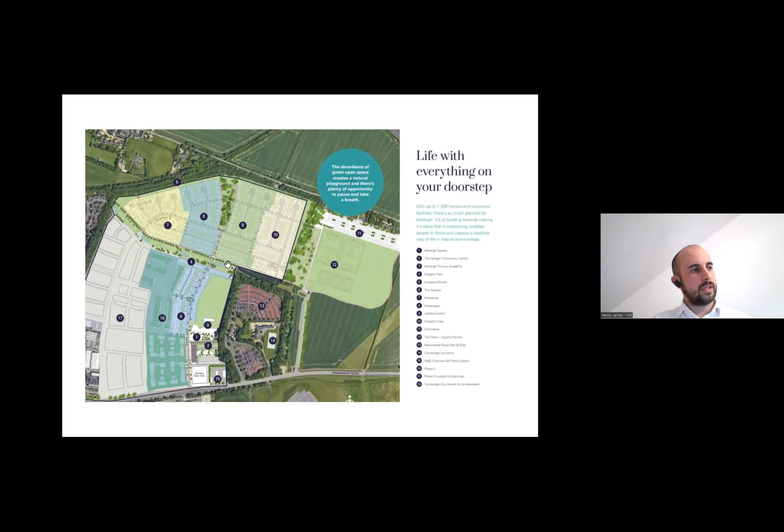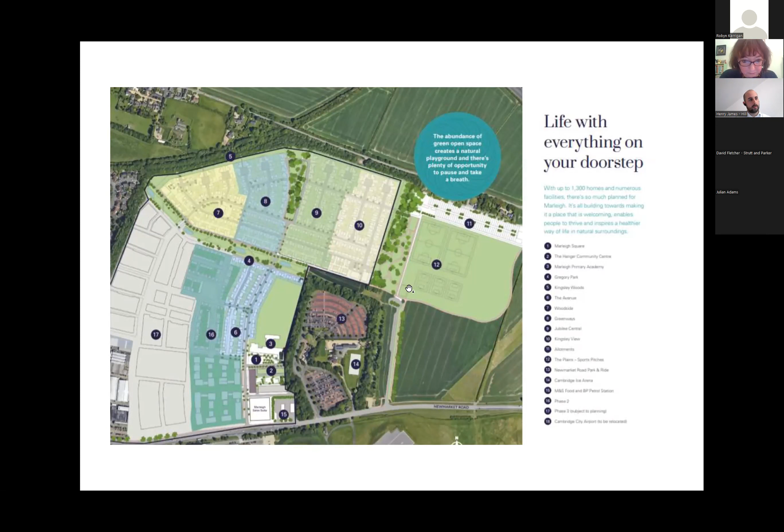And I think probably the final point I'll raise is on wider infrastructure and routes going on. For those who know the site well, you may have recently seen we've installed the bridleway through Kingsley Woods on the northern section. So in addition to what we've delivered previously, such as the new cycle route through the scheme, those wider connections are starting to take shape further. We've still got bits of work to do, so other works will be scheduled soon, which will finish off the routes on the disused railway line at the northwest of the site. There'll be further routes to come connecting into the site and beyond over at the Plains area in due course, at relevant trigger dates.

I've included a couple of drone images for context. This is within Marleigh at Gregory Park, looking back south towards Newmarket Road. You can see the delivery of the phase 1A houses here, and the apartments in the distance. The school site here, which Prue will talk about shortly, and then this area of vacant land here is phase 2 - you'll start to see that take shape over the next year as it's delivered. Beyond that is Marshall's retained land, which is phase 3 - the next phase of Marleigh in due course, though obviously a slightly different scenario given Marshall's existing operation.

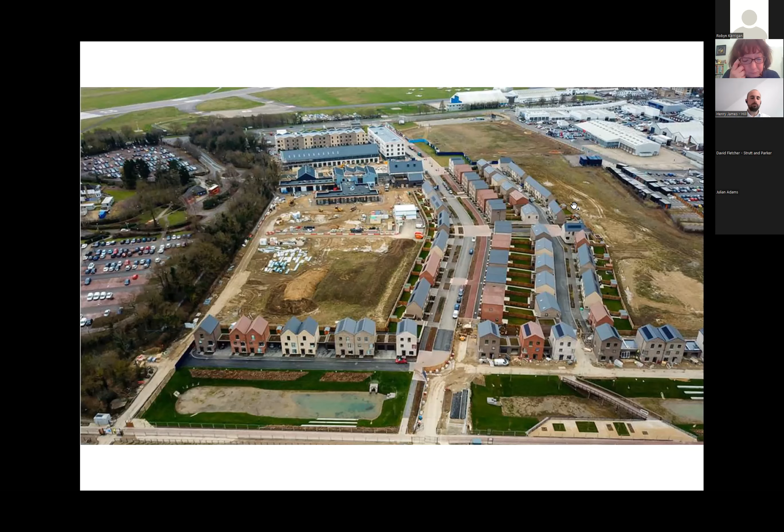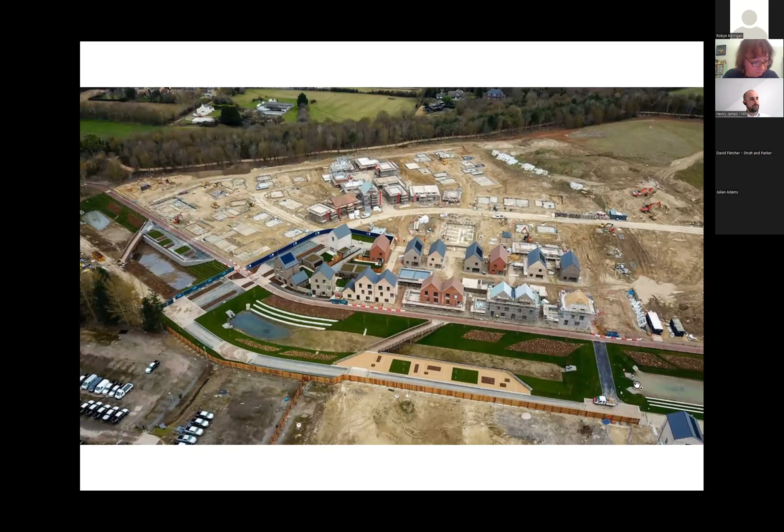This slide I wanted to include just to show context of the build phases 1B and 1C in phase 1 at the moment. 1B you can see here, and 1C to the side here. That will really transform over the next year or two. And Gregory Park itself, with the swales and the landscaping, is really starting to take shape now.

Here's one final image just to show the context of the remainder of phase 1, which, as I said earlier, will be delivered from left to right. Appreciate this isn't quite the right orientation, but from where my cursor is moving along over the forthcoming years.

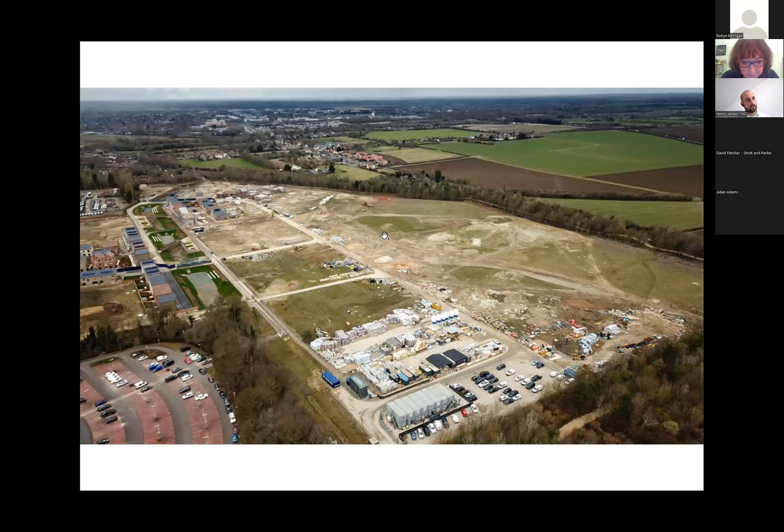So I'll hand over to Prue. I appreciate there'll probably be some questions - Sharon, I don't know if you want me to take the questions now or pick them up later, any preference? If you could pick them up later, please. Yeah, absolutely, that would be useful.

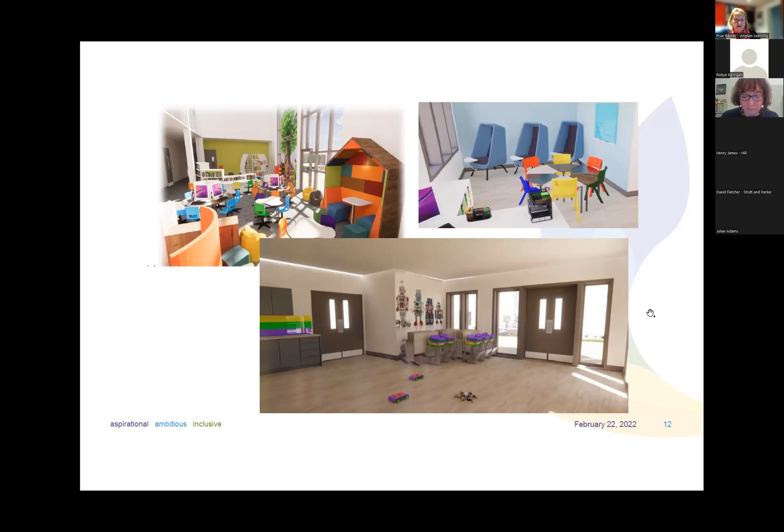The bottom picture will be our STEM room, where we will be teaching science and technology and developing IT, and certainly undertaking learning in computing and robotics. The last picture really enhances some of the information that Henry has shown.

One of our aspirations was for as many year groups as possible to have immediate access from their classroom to the outdoor learning environment. The only two year groups that won't have that are years 5 and 6. We think we've created an upstairs area where those children can start to graduate, and we'll start thinking with them about moving on to secondary provision. Thank you.

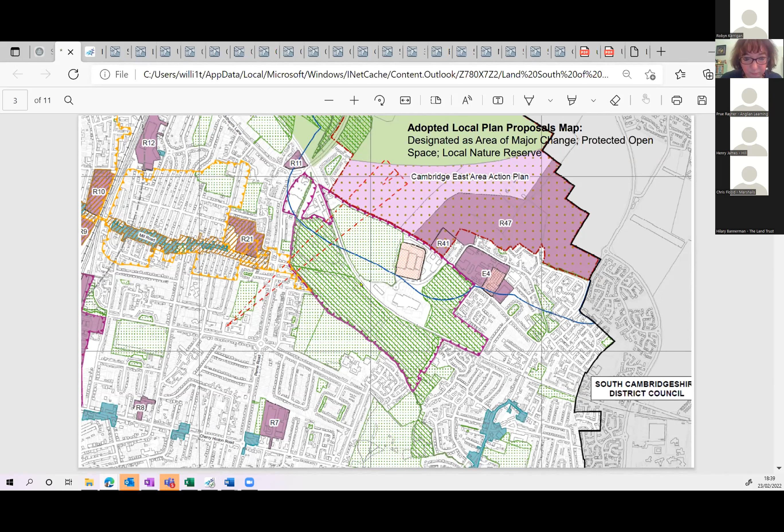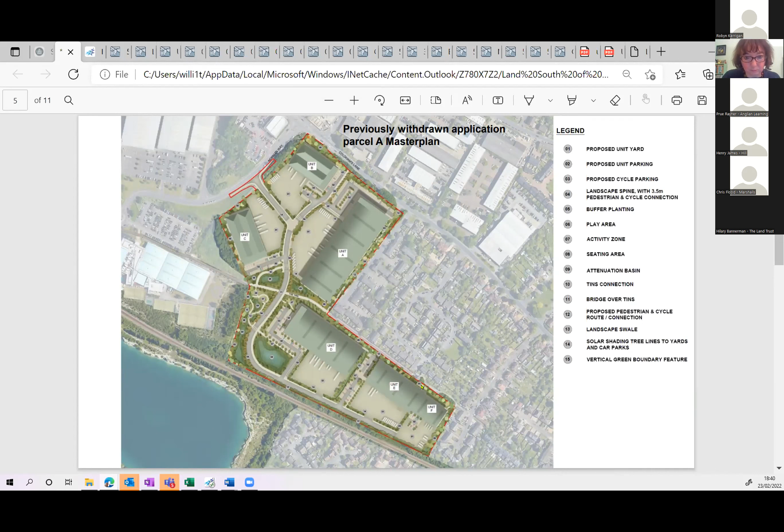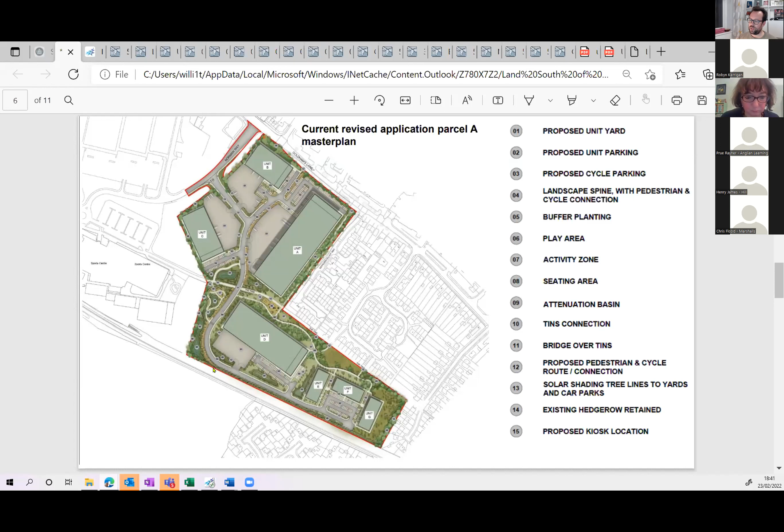close to the boundaries with the residential estates, Kathleen Elliott Way here, for example, to the east. You can see with this current revised master plan that the applicants have attempted firstly to pull Unit A away from this boundary, and then the biggest changes relate to the units proposed within this southern parcel here, not only in terms of the uses not encompassing B8, but also being pulled away significantly from the boundary with the tins here, this northeastern boundary. There's a landscape buffer proposed between these units, and the access is coming down to the south. This is the railway line here. So the indicative layout has changed considerably.

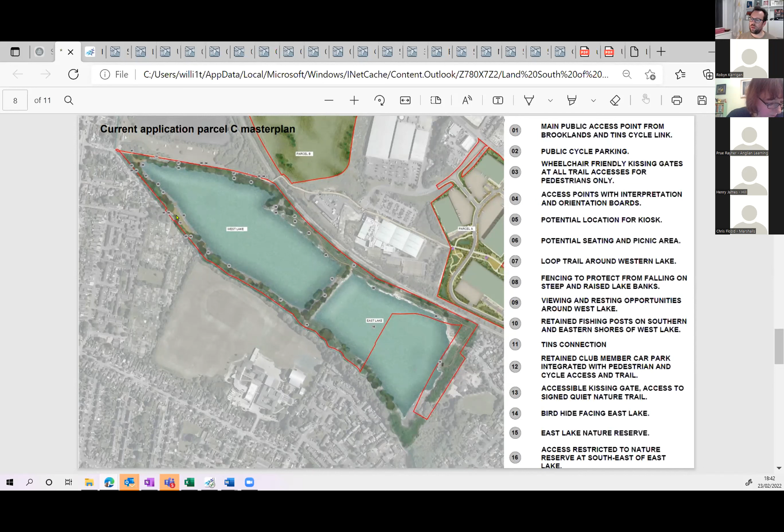This is another plan showing the proposals for parcel C, and then looking more closely at the west and east lakes. The master plan details some of the interventions that Andersons are proposing for the lakes, including some additional access points from the tins and a resurfaced car parking area down here on the west of the site.

and the environmental harm people are concerned will arise in terms of air quality and noise in particular, and HGV routing, particularly the timing of that, given that it's proposed as a 24-hour logistics centre. There are also a number of concerns raised in relation to biodiversity. The Wildlife Trust has provided an objection to the council on the grounds of biodiversity. There are also some local groups which have raised similar concerns to the Wildlife Trust in terms of impacts on biodiversity, and also the brook that runs alongside the southern side of the site.

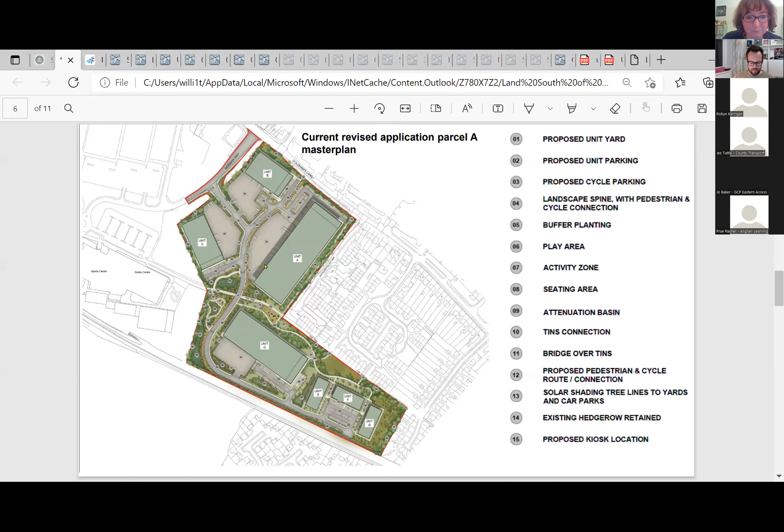Perhaps I can just share my screen again. That would be helpful. Hopefully I'll be more successful in sharing it this time. Or perhaps not. I can see the screen. Can you? I can't see it. Hang on, can you see the master plan, Sharon? Yes. Okay.

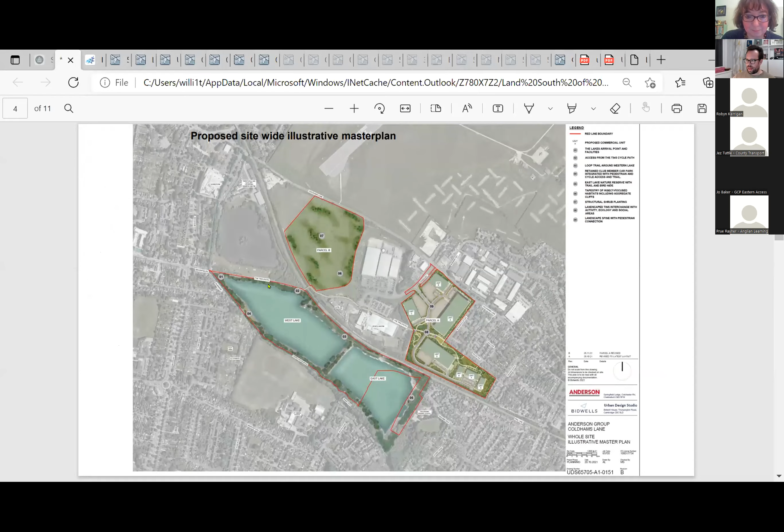So access to the lakes, as I understand it, is proposed in a number of locations: from the Tins here, at the main entrance at 1, another entrance at 2, and another entrance at 4 down here. I'm sure I've also seen a more detailed plan that shows an access halfway between 1 and 2 as well, but those are the access points, and from the Tins the access is pedestrian and cycle only.

Thank you, we've got another question from Salim Sadat, I'll read this out briskly, Toby. Prior to submission of application 21/02326 full last year, after many years of consultations with Anderson Group, we fully expected it to be similar to the proposals of a few years ago of low-rise commercial units for light industry and office space in accordance with the adopted local plan. However, what they submitted last year was totally different, in that they plan to build 8 storage units functioning as a 24/7 last mile logistics hub. The claim by Anderson Group in section 9 of their design and access statement that there'd been extensive engagement with the community for their latest plans is simply not true, as it bears little resemblance to their original plans discussed and exhibited in 2017, 18 and 19.

Just to say for everyone's benefit, this site benefits from outline planning consent, which was granted in December 2020. Following that, very shortly afterwards, Bellway Latimer acquired the site, and our first steps from a planning perspective have been focusing on the design code for the site as a whole, and also looking at the discharge of some of the pre-commencement conditions.

The real focus for the presentation today is really just to talk through the design code and where we've got to on that, and then at the end, to wrap up and talk a little bit about the public consultation that we're seeking to do on the design code, and the events that we've organised for that.

In terms of the design code, there's a lot of different strands that come into the document, and we've been working quite collaboratively with the Greater Cambridge Shared Planning Service, principally looking to set the design quality for the development as a whole, with real focus around the appearance of the buildings and how the layout of the site is going to work, key considerations around different street scenes within the development, including key principles around landscaping, along with what we're doing about energy efficiency - not just in terms of the built form of the houses, but also all the other land uses and how that fits into the overall approach to sustainability across the site.

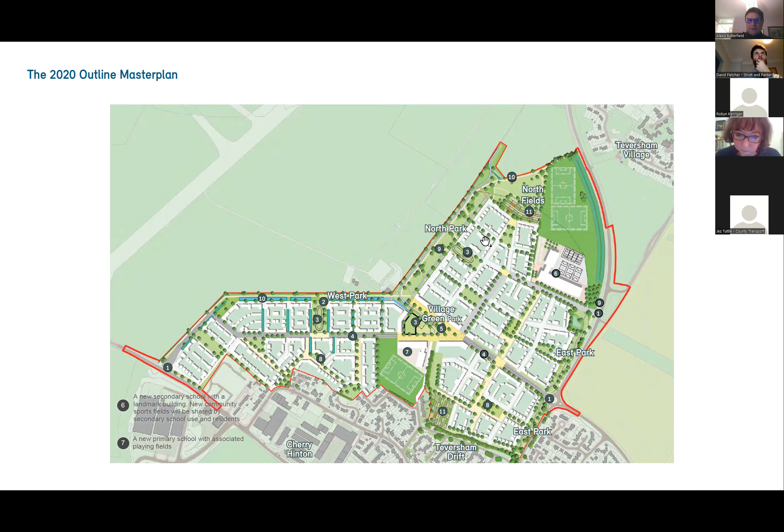So to kick that process off with the planning team, we first of all had a great day out doing a Cambridge project study tour, which meant we could go together as a shared group to a whole host of different recently completed projects within Cambridge and the Cambridge area.

And it was a really great opportunity to essentially find what works, and what lessons we can learn from those developments to make sure we're doing all the good things they did and avoiding some of the pitfalls.

So if I go to the next slide, following up from that, we've been undertaking a whole series of workshop events with the planning team, but also bringing in all of the members of highways and landscape, so that we can create a really kind of integrated process.

We've started from very simple beginnings, and we're going right through to quite a lot of not detailed design, but certainly detailed principles about how the rest of the scheme is going to work.

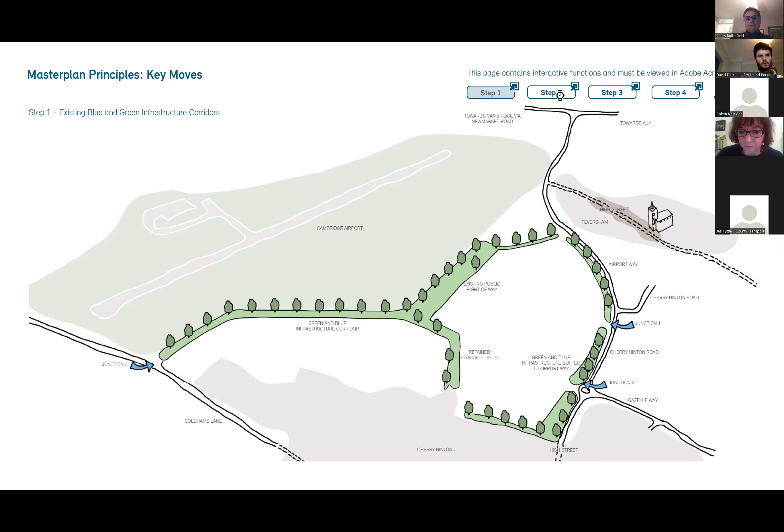But the next step was where we really started to add extra quality to the scheme. So the first thing is creating these green and linked linear landscapes that move right across the site, both east-west and north-south.

As well as providing nature corridors, these provide corridors for the movement network of safe cycling routes and walking routes. And you can start to see how, even at this big scale, they start to link things up.

Then the next level of detail in terms of our key moves was really thinking about how those start to integrate with other landscape spaces, and a tree planting program that will really get a good tree canopy across the scheme in the long term. Again, these were all focused around the pedestrian and cycle routes, so that wherever you're cycling or walking within a development, you're never far away from passing through another green space.

We've been looking at how we integrate community, education and retail uses and all the other things incorporated into the development, particularly thinking about how wherever you live in the development, you can travel along one of these nice green corridors to get to those major uses.

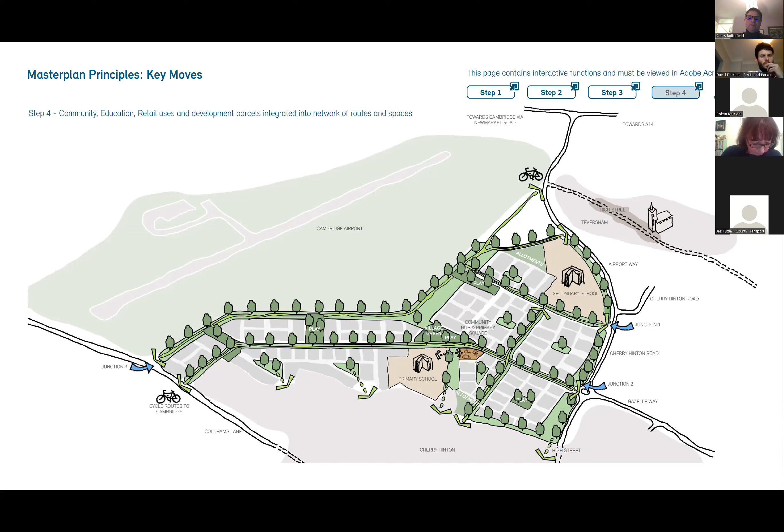So that was the work we did to evolve the master plan, and it's gotten a really positive response from the quality panel, and it's been a really positive process with the planning team. So if I go to the next slide.

Moving beyond that, we needed sustainable principles to be technically set out. It's about really understanding that sustainability isn't just energy, it's lots of other things as well. So the first thing we did at a very early stage was make a commitment to say no individual gas boilers, and to move away from gas on the site, so from day one, everything will be powered by renewable resources.

The next thing, as part of those sustainable principles, is sustainable lifestyles and healthy lifestyles, making a walkable neighbourhood and prioritising sustainable transport modes, basically walking and cycling. And then, as I was talking about earlier, it's urban greening, the idea of getting tree cover and reducing hard surfaces as much as possible.

It's also fabric-first design, so high quality building fabric, which helps make sure sustainability is actually built into the buildings. And finally, that phrase climate change resistance and resilience is really important to us, because it's not just about designing for now, but designing for 30, 40 and 50 years' time, and how management might change for the site.

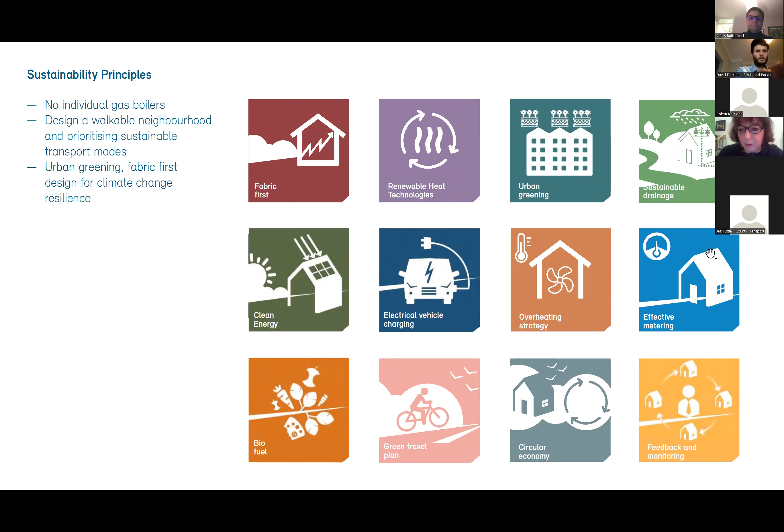The National Model Design Code is the latest document that's come out of what was MHCLG. What it does, which we think is very helpful, is set out 10 characteristics of a well-designed place. We've used these 10 characteristics they identified for making a great place, and essentially we're using those to structure our whole design code.

So it takes it right through from the context and identity of the place, through to how you build in nature, and then how you care for the buildings as well, and the landscapes, in the long term.

We have an emerging master plan coming out of all of this, following all the principles I was talking about earlier. We're trying to bring together all of these various aspects into one place. So the first thing is really thinking about the integration of the place, both with the surrounding area, which is particularly important, and also between the different neighbourhoods we're creating.

Conservation - one of the assets of the site is the tree lines, and particularly the water routes through the site, and it's about conserving those and incorporating them really well into the development. And then it's about identity.

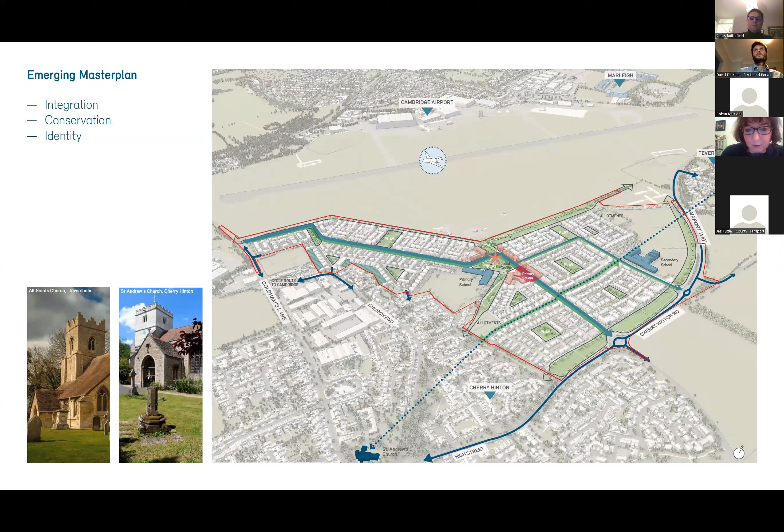I think identity has lots of different levels. It's the identity of the whole place, related around what's called the primary square, that red area on the site, where all the non-residential and community uses are, right through to the little characterful neighbourhoods that can be created around different parks.

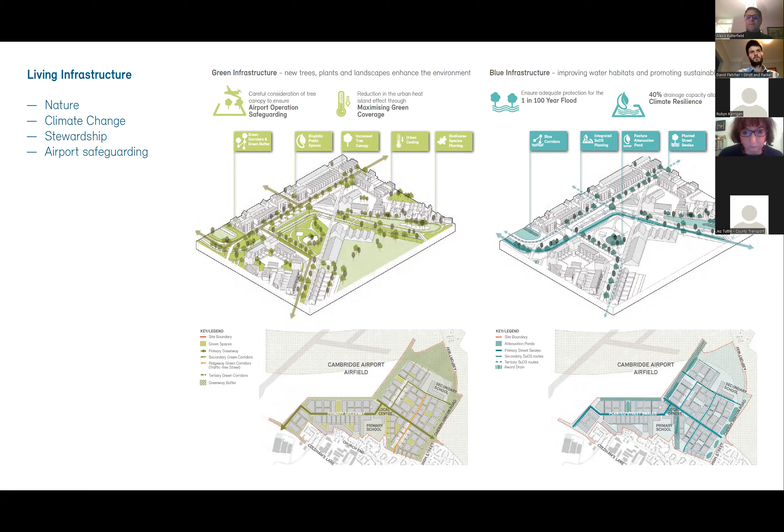And that's for both the green infrastructure and the blue infrastructure. The streets and public spaces are all being designed to incorporate street trees and cycle paths, and we've got cycle paths on both sides of the street. We're making sure that streets are very much designed with the buildings, the street trees and the routes all together, and you can see here in these diagrams how all of those start to come together for the code.

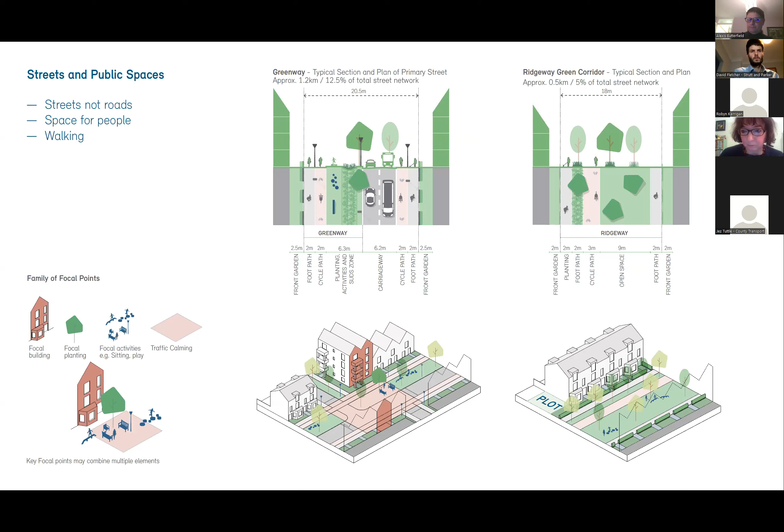We've got our home designs. The principles here at this stage for the design code are really about how we make sure we get variation in the homes and diversity, thinking about how we can use design to get really good street frontages and create interesting streetscapes that enclose the space. And finally, having a real community focus so that streets are designed with the homes around them, so that when you leave home you get to meet the neighbours.

The other thing that's really important in all of these things is thinking about how sustainable design is built into all of those parts, particularly with flat blocks and things. We're making sure that all of our flats are dual aspect wherever possible.